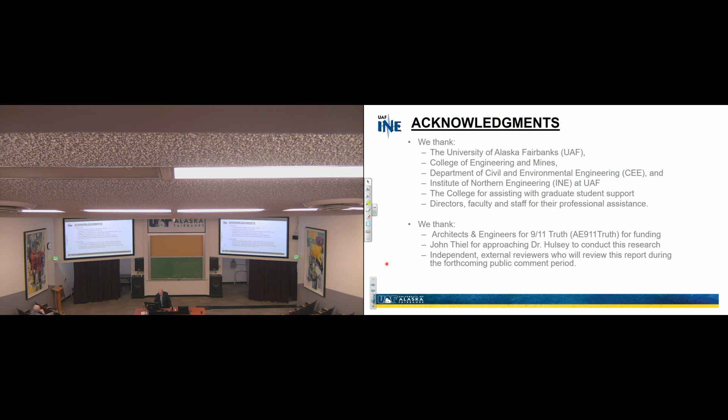WTC 7, the building we're going to be looking at, collapsed at 5:20 p.m. on September 11th, 2001. My focus on this presentation is to present our findings and conclusions from a 4-year study here at this university looking at this collapse. We'll share our methodology and the science that led us to those results. Unlike the Twin Towers, this building was not struck by a plane, so why did it fall? That's the name of the game here.

This is actual footage of the collapse we're about to look at. I want to share this with you to get an idea of why this is so important. 47 stories, all steel structure, and I'm going to let you see it from different angles.

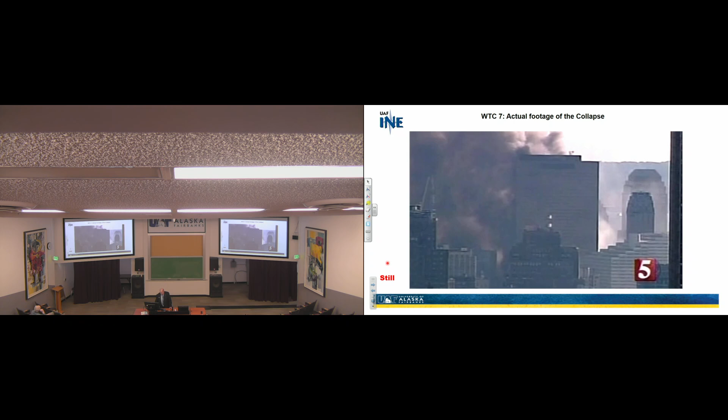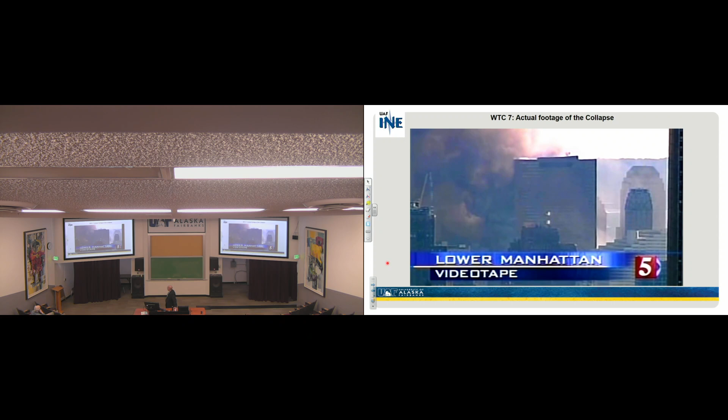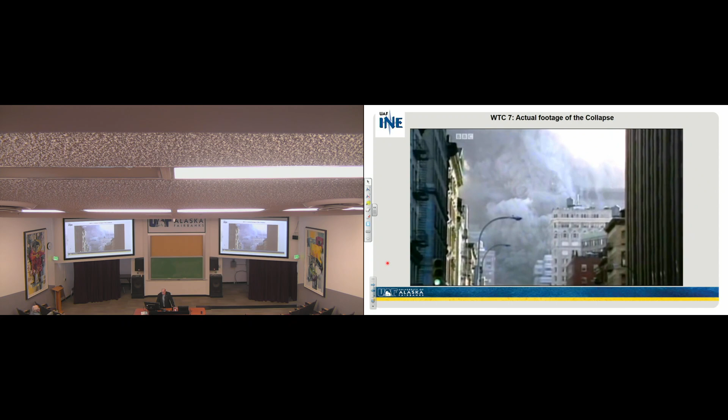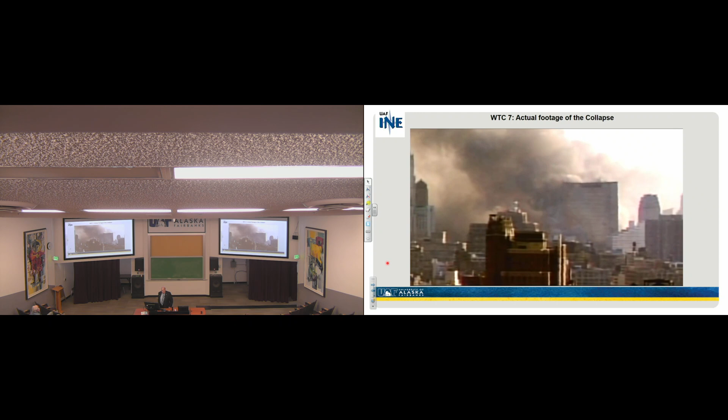So if I go to that, this is what's going to happen - Lower Manhattan. You'll be able to see that this thing didn't waste any time. Fortunately, nobody in the building was killed. We're just taking you through different views that were available at the time this occurred. I'm on mute so I don't interfere with what you're looking at. So we're about done.

So the items I felt we needed for this study were: the structural geometry, the floor usage at time of failure, the structural properties such as mechanical and thermal properties for the concrete and steel, and the structural steel framing, reinforcing bars, and concrete for all those properties.

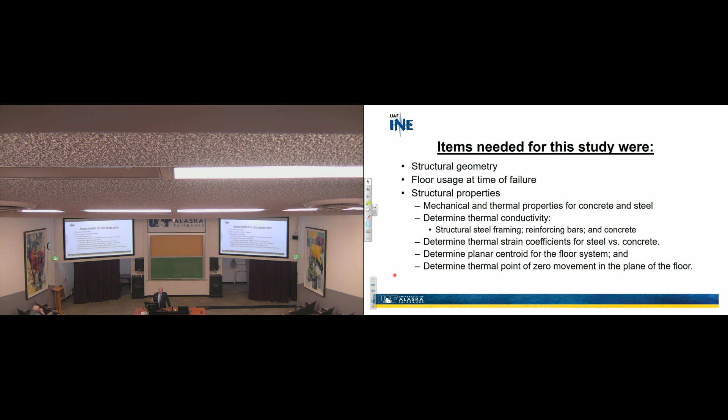We wanted to look at the thermal strain coefficients for steel versus concrete. The reason we're doing this is because they said it was a fire that brought it down, and expansion and contraction with temperature is important, particularly in a fire when it gets really hot. So we needed to look at these properties. We needed to determine the planar centroid for the floor system, and the thermal point of zero movement in the plane of the floor. I'll explain shortly why those things are important - they were totally ignored before by others.

The UAF methodology is as follows: we obtained the erection and fabrication drawings used to develop a virtual structure. Our programs were AutoCAD, SAP 2000, ABAQUS, and SolidWorks. We established right at the beginning a quality control program so we had non-disputable science every single day. Every day we'd meet, criticize each other's work, come to a consensus, or go back and reevaluate. Science was the first and foremost issue of doing this study.

I didn't want opinions, I wanted truth. I wanted science telling us the story. So we created it around the physics, around the engineering, around the things that we knew and could go and justify.

Both Dr. Xiao and Dr. Quan, who are graduates of this university with their PhDs, did this work on this study. Dr. Xiao actually did research to get his PhD on bridges, monitoring structural behavior of bridges. Dr. Quan did his study on heat transfer and also a part of this building.

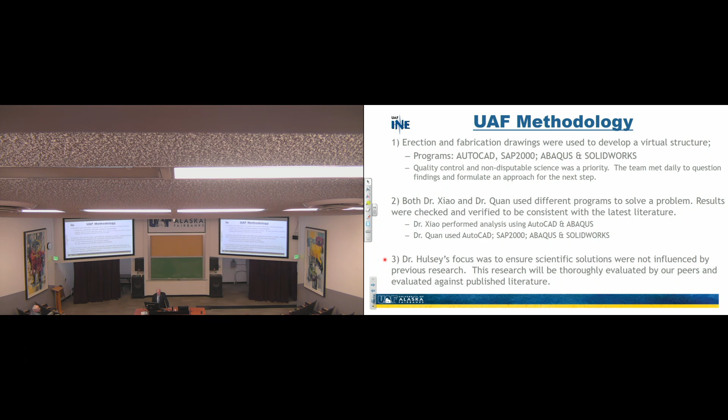Let me give you some history behind this building. The developer was Silverstein Properties. Construction started in 1983 - this is important because we need to know when it was built, what kind of steel was in it. Construction was completed in 1987. The height to the roof was 610 feet, 47 floors, 2 million square feet of space, 32 elevators. The architect was Emery Roth and Sons, and the structural engineer was Irwin Cantor out of New York.

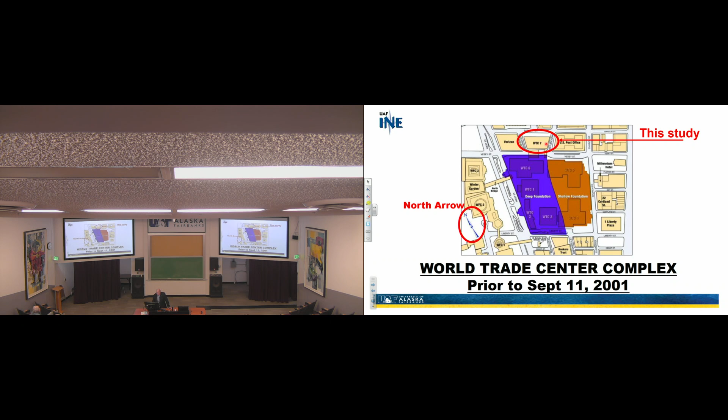Looking at the overview in the plan view of that complex prior to the failures, this was prior to September 11th, 2001. You'll see that this is WTC 7, that's our study, and this is the north arrow, so this is the northeast direction here basically. Here's WTC 1 and WTC 2 that came down by the planes. What's important to think about is WTC 1, when it came down, the debris struck WTC 7, and that debris produced, as most people believe, and I see no reason not to believe that, caused some interruptions in some columns, and it also produced fire in the building. So there was fire - please understand that.

This is a different way to look at that building. What you see here is a north elevation, south elevation, west elevation, and east elevation. Floors 13, 16, 19, and 45 - those are all significant floors that I'll share with you as I go through this.

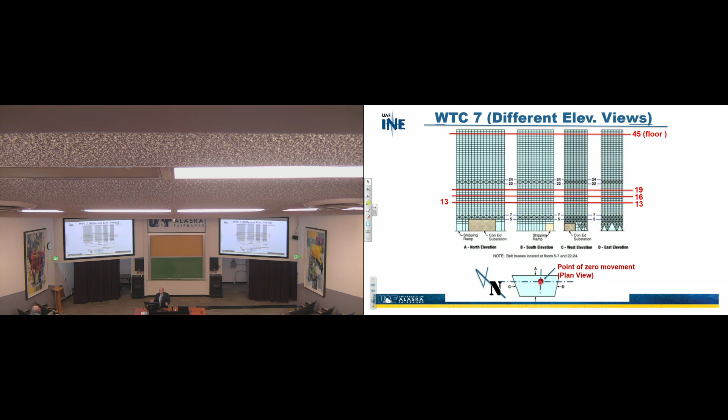This is a point of zero movement. Why is that so important? That is so important because when it heats up, that's the stiffest spot within that planar floor, and therefore everything's going to move with respect to it. So when it heats up, it's going to move in every direction with respect to that red point. It was important to know where that's at.

This kind of gives us a usage of this building, the tenants. You can begin to see that the fires were actually in the floors 12, 13, and below. Look at what's going on here - Secret Service, Securities and Exchange Commission on floors 11 to 13, that was financial, Provident Financial Management. All those floors where all that fire was going on were those kind of things. If you go upward here, Hartford Insurance Group, National Association of Insurance Commissioners, Equal Employment Commission, and so forth. Office of Emergency Management, Federal Home Loan of New York, and then I thought I saw in here somewhere, of course the IRS is there, Office of Emergency Management. I thought really Giuliani's office was here somewhere - anyway, I thought I saw that, but I don't see it today.

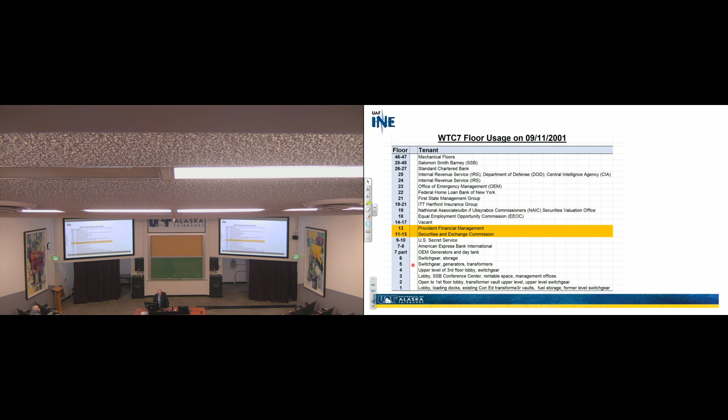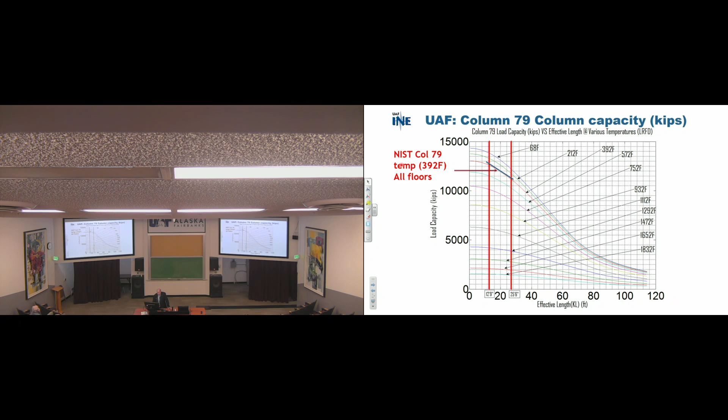This is just another view of that from a different point of view. This is what's called column 79, the capacity of that column we're wanting to look at. This is an unbraced length of 25.5 feet and an unbraced length of 13 feet, so it kind of gives you a range of 2 stories and what we would expect. And there was 392 degrees Fahrenheit for those temperatures in that range, okay?

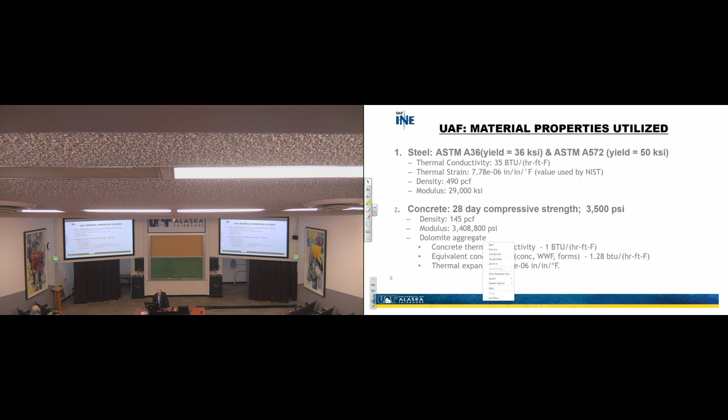With that in mind, we then took all those properties, utilized them, and established the response materially and sectionally, how each one of these members would behave. And with that idea, we could actually start predicting what's going on.

Now, the science behind this study: first we examined the response to fire loads. When I say fire loads, we're looking at fires on various floors and the distribution of that fire, and how it impacted that floor and anything else around it.

The methodology I put together had three approaches. First, we simulate the local structural response to fire loading for floors 13 and below. This is where the fires were.

Number two, we examine collapse initiation hypotheses developed by NIST - the National Institute of Standards and Technology, where the report came from in 2008 - and examine the collapse hypothesis advanced by private engineering firms whose studies were commissioned as part of litigation related to that collapse.

So really what I'm saying is NIST was the big report, and then there were private studies done also during that litigation period. We simulated numerous failure scenarios within the overall structural framing, and for each we identified the response and what would lead to the total collapse observed on 9/11. That's what we did.

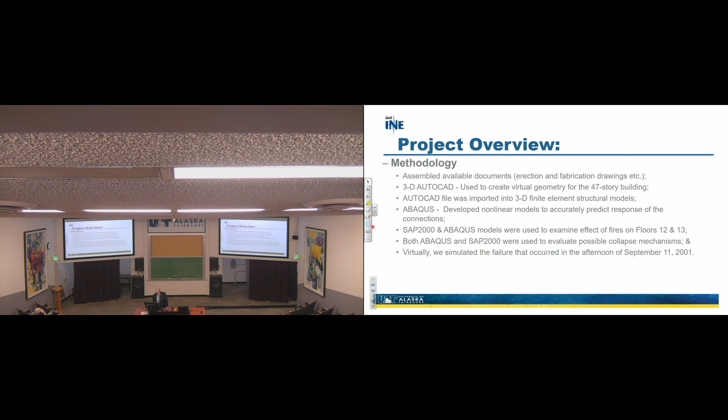Let me share something. We had some of our conclusions done a year ago, but it took us a year to figure out what really were the details of what actually happened during that collapse. We'd already ruled out a lot of things that we knew wouldn't cause it to fail, but those details took us forever. I wasn't sure I was ever going to get through it.

It was that complicated. So the essential findings were: fire did not cause the collapse of WTC-7. Point number one - I told you that on September 6, 2017, and two years later I'm telling you the same thing. Temperature was not high enough to cause weakening of the steel framing. However, thermal expansion did not result in a loss of support for the beams and girders, yet NIST claimed otherwise.

So here's an important point - I'm already different from them because of that issue right there. They're saying the beams in the floor system expanded and caused a problem. I'm saying it expanded but didn't cause a problem. I'll share the details here shortly.

WTC-7 did not experience a progressive collapse as claimed by NIST and others. It was actually a global collapse. So those are my essential findings that are really critical to what we're doing.

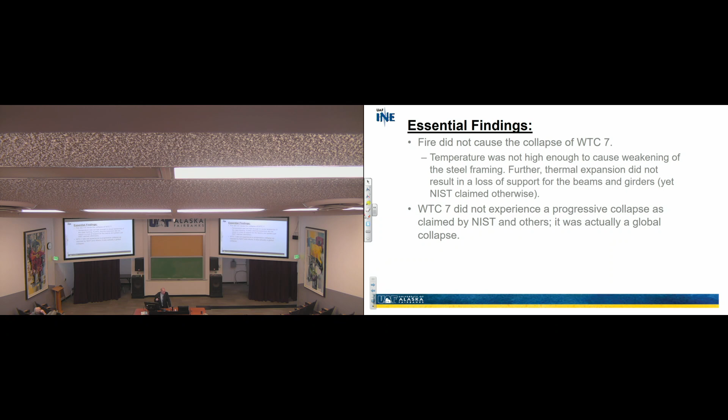I'll give you a number of details as we go through it. The problem is this: the National Institute of Standards and Technology, NIST, reported that WTC-7 collapsed due to fire at 5:20 in the afternoon on September 11, 2001. NIST also reported no other tall steel frame building had ever failed due to fire.

So why is this so important? It's important because it's essential for ensuring public safety that a failure mechanism for a structure is understood so we can prevent it from ever happening again.

We can't afford that. So therefore, architects and engineers, 2,600 of them, put together a non-for-profit group, funded this university to re-examine that WTC-7 collapse. The money came from them through their own donations. So this is how that worked, okay?

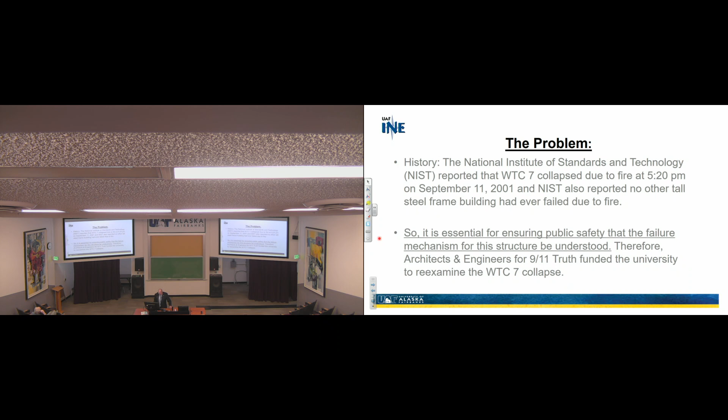Now the key findings of this UAF research team, I'm going to give you a little more detail. So now I'm getting into the details, okay? And I apologize if I'm getting too detailed. So please drag along with me.

Approach one is that NIST overestimated the exterior wall rigidity. Subsequently, NIST argued floor expansion was westward as it moved from the east exterior wall. So remember that east is to your right, as you're looking at that complex, at that building.

And imagine that they locked that wall system and then heated it up. What's going to happen? It's going to move away from it. No, that isn't what happened. The building couldn't do that. It would have to move away from the stiffest area, the centroid, what I call the point of zero movement thermally.

And that was very close to the elevator shafts. So actually, the exterior walls were flexible and thermal movements were from the point of zero movement near the elevators, and therefore planar thermal movements were from west to east at column 79, not the other way around. When I presented that in Boston and in New York at the time - New York was at the 15th anniversary, Boston was a little bit later - that was the first time they'd ever heard such a thing about this. Everybody had always been assuming that the movement was exactly what had been stated it was.

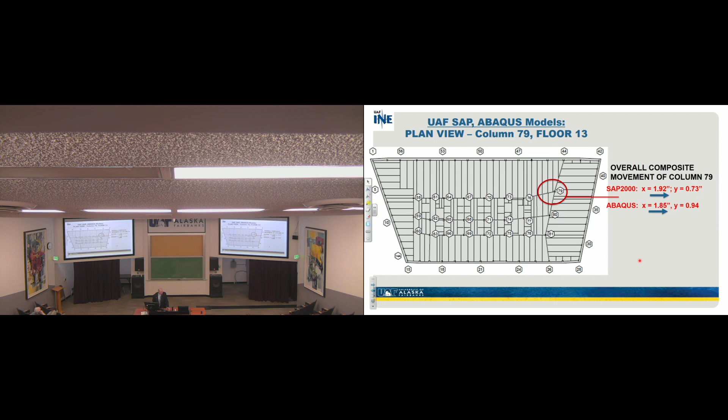All right, good. So approach one - NIST, wait a minute, I'm sorry. So the other thing I want to share with you is the movement of girder A2001 relative to the column 79, floor 13, was as follows. We looked at composite, partially composite, non-composite, and NIST only looked at one thing.

That was 5.5 inches to the left, non-compositely, and these are the things I just told you about a few minutes ago. NIST later revised their girder movement to 6.25 inches after being alerted that the bearing seat was 12 inches wide and not 11, as originally stated.

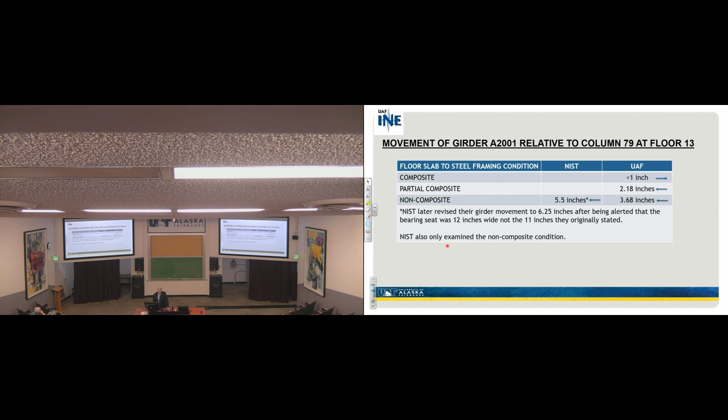And NIST also only examined the non-composite condition, which wasn't the case on that day. It was truly composite. Approach two.

We took ABAQUS, a very, very sophisticated finite element program, which if it doesn't have the algorithms you need, you can add them to it. It's really quite powerful, a wonderful program.

We looked at that program and used it to simulate, using solid elements, the floor framing for floor 13. That's where all the buzz is about. These elements were used to evaluate the validity of NIST's collapse initiation hypothesis, and the NIST assumption that the exterior east wall was fixed was not valid, it was flexible.

I think I've already told you this more than once. Shear connectors on several beams were assumed broken, but we saw no evidence to consider this a valid assumption.

NIST assumed no shear studs were on girder A2001, but we found there were shear studs on that girder based upon the legal records, the court records. NIST also assumed bolts fastening girder A2001 to its seats at columns 44 and 79 were broken. This was also an invalid assumption.

Okay, so here's what we did. Using the NIST assumptions, even though we know that they're not right, if girder A2001 was going to be heated up, we would find it would get trapped behind the west side plates on the flange of column 79 and wouldn't be able to get off of that seat anyway.

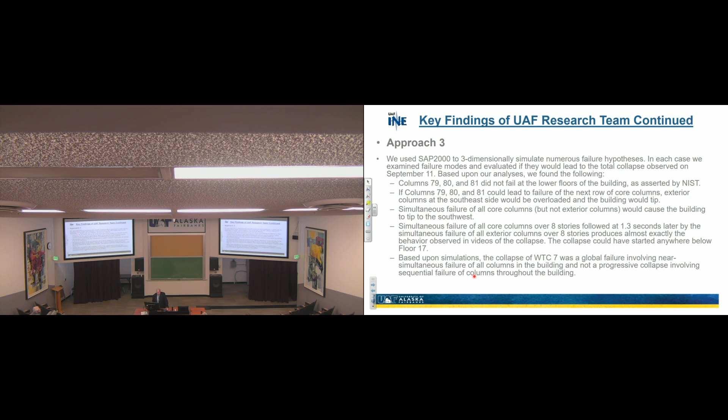Actually, the penthouse came down 5.5 seconds earlier, and I'll show you all those details. Based upon simulations, the collapse of WTC7 was a global failure involving near simultaneous failure of all columns in the building, and not a progressive collapse involving sequential failure of columns throughout the building, as lots of people have argued. The details behind the science.

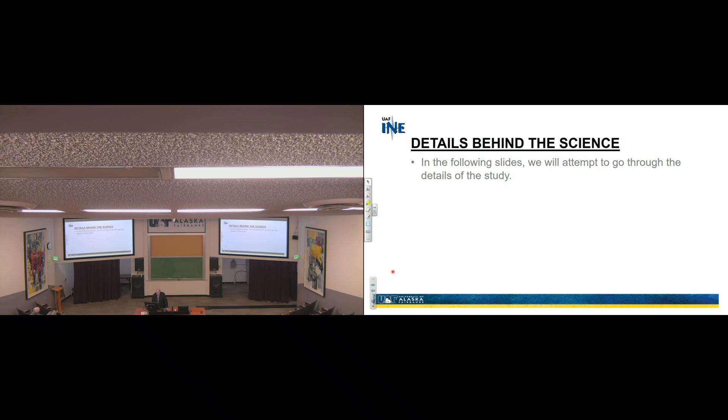In the following slides, I'm going to attempt to go through the details of our study, and I apologize if I'm going to bore you to death.

First, we determined mechanical and thermal centroids at floors 12 and 13. That's the first thing I did the first day we started, because I felt we needed to know if you heat up a floor, where it's going to be moving with respect to.

So I've said this more than once. But we also wanted to know the mechanical centroid, because if you apply a load somewhere on the building, is it going to twist? Is it going to rotate? Is it going to tip? What is it going to do? We need to know its response. It's like a human being: you do something to it, you're going to get a response. So a building behaves similarly. Sometimes it doesn't like you.

Second, we developed a nonlinear spring stiffness for the connections. That was to save time and also to get an understanding of how the connections between the girders, the beams to the girders, and the girders to the columns actually behaved.

Then we developed an equivalent nonlinear spring for the computer model. Third, the concrete floor was built using stay-in-place steel forms, which means the stiffness of the floor was different in mutually perpendicular directions. The forms actually have flutes, and they are stiffer in one direction than the other. It gets poured full of concrete, and therefore the structure behaves differently.

So this was accounted for by developing equivalent performing elements, which we did to save time. Then we could take those equivalent elements, basically substructuring the structure and looking at its behavior. And fourth, we examined the planar thermal movements of the floor for composite behavior. That's when all the shear studs were in place. Partially composite is for frictional resistance between the concrete floor and the steel framing. And then non-composite, in which we allowed for no shear studs or frictional resistance, which is the way NIST did it.

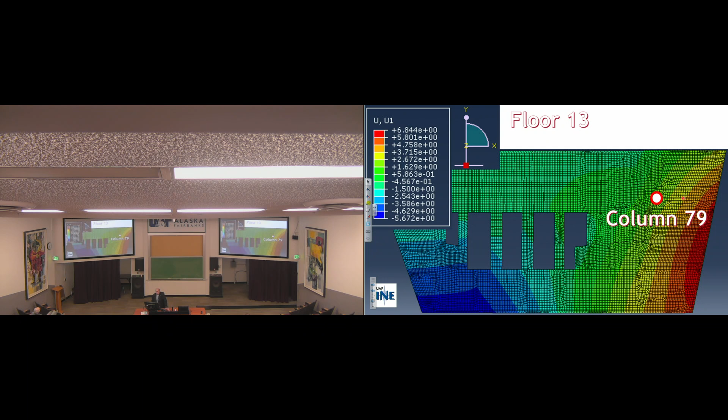So where is all the movement coming from? Look down in here. Plus 5, minus 4, somewhere in this zone is where that movement is occurring from. You see what I'm saying? So this was a computer model of the heat that was put on using the NIST fires, and we simulated them to see if we agreed. This is column 79, and at floor 13, we had 1.85 inches to the east and 0.94 inches north of how much that moved at 600 degrees C.

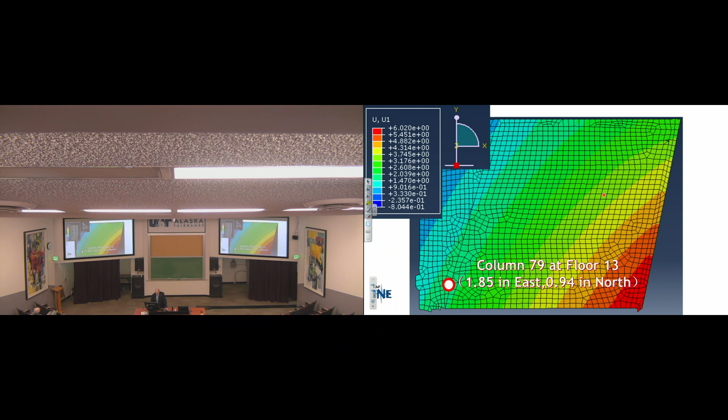Evaluation of the NIST hypotheses is what we're going to talk about next. Here is column 79, here is column 80, 81, column 44. Here's a group of beams with horizontal stiffeners between them so they wouldn't buckle. And here's the other beams, B30048, and so forth. The reason that's important is we're going to take a computer model and virtually simulate that.

Then use the NIST assumptions to see if they were actually correct. I didn't want to just say, okay, I'm not going to accept it. We needed to be sure whether it could have been correct or not.

NIST argues that the absence of girder shear studs caused the girder to not have sufficient lateral restraint. Failure of the girder to column connections were caused primarily by thermal expansion of large span lengths of the northeast floor beams. This is their argument, these are not my arguments, please understand that. You see the big letters NIST? Okay, that's not mine.

So, absence of girder shear studs. If they're absent and it's heating up, and it's moving from that exterior wall that they claim was fixed, then it's going to go west, okay? And this is a plan view, and this is girder A2001 from the drawings, from the actual drawings.

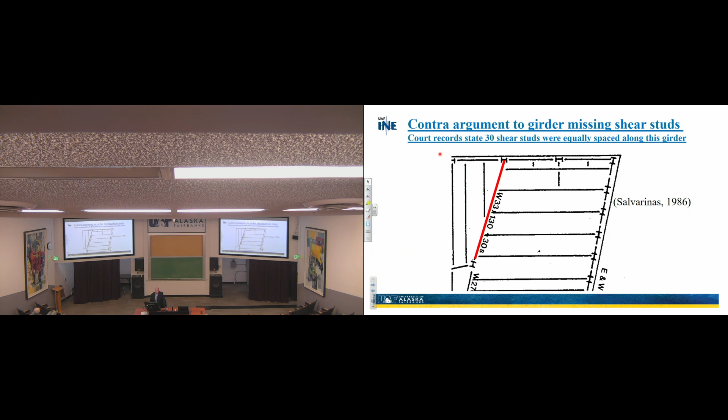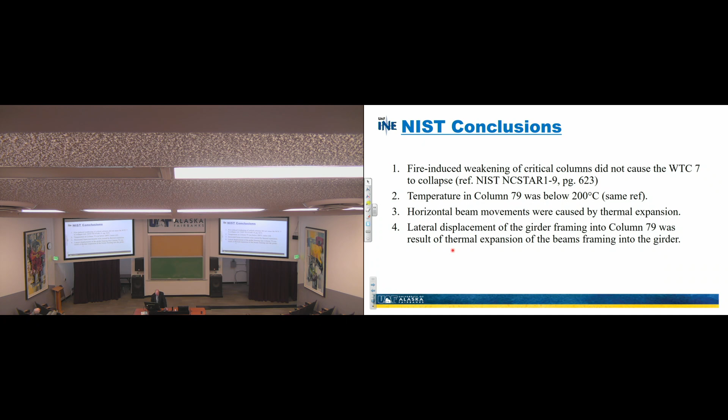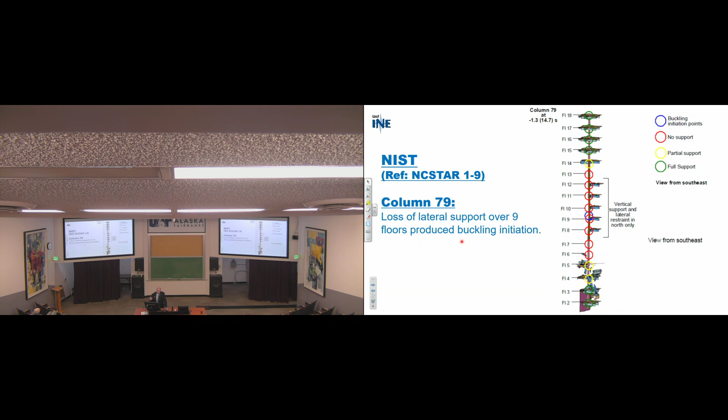Basically, they said at column 79, they lost lateral support over 9 stories, which then caused a cascade of failures to occur. And from that, you would have ended up with the failure you would have seen in the video. Keep in mind, if I was to go back...

Where's column 79? It's not in the middle of the building, it's over there on the northeast corner, pretty much, right? And notice, there's nothing symmetrical about this building, it's a trapezoid. So those things aren't helping anybody. And it was quite a complex building.

The other thing we discovered pretty quickly is NIST modeled the connections within this zone, all around column 79, that whole area. But they did not model the connections over here, and they did not model the connections along the exterior. So all the area of floor where connections were modeled, from floors 8 to 14, were in that zone, which really bothered me, because it's not representative of what the building actually had.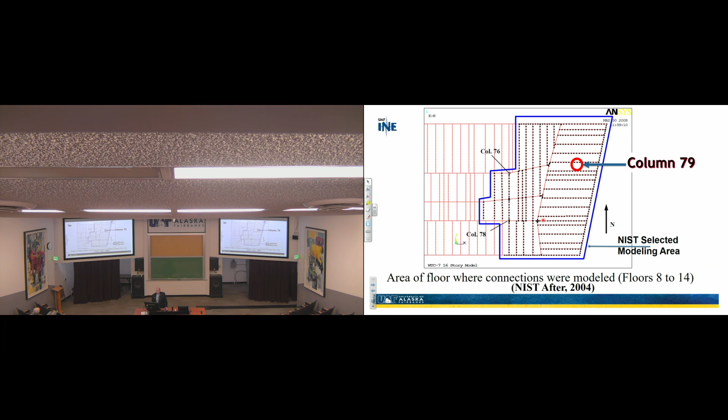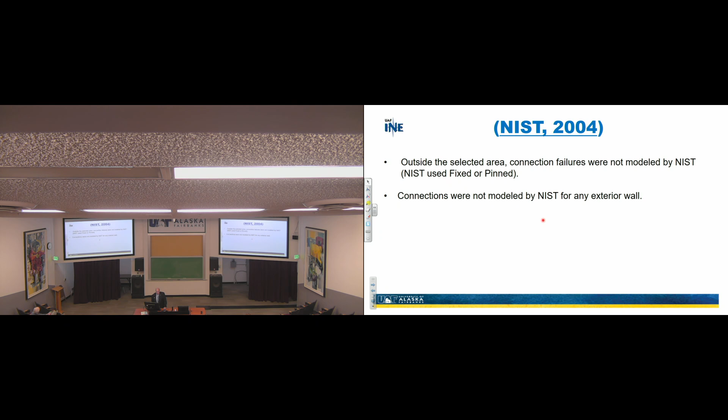So outside the selected area, connection failures were not modeled by NIST. This is just a summary of what I just told you. NIST used fixed or pinned connections, and these were not modeled by NIST on any exterior walls. And so here we are.

A girder was considered to have lost support when its web was no longer supported by the bearing seat. The bearing seat at column 79 was 11 inches wide. Thus, when the girder at column 79 had been pushed laterally at least 5.5 inches, it was no longer supported by the bearing seat. Really? Well, they changed that from 5.5 to 6.25 later.

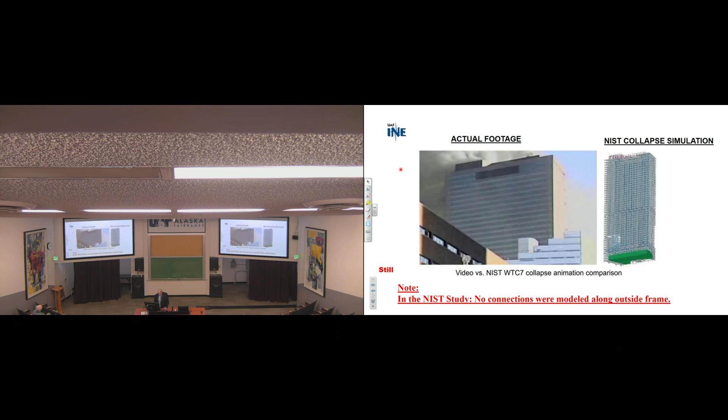So NIST's results were, okay, let's take a look. We're going to look at their model, their simulation, based on what I've shared with you so far, and the actual footage. So bear with me. Note that in the NIST model, no connections were modeled along the outside frame. Just remember that. So here is the simulation that they have.

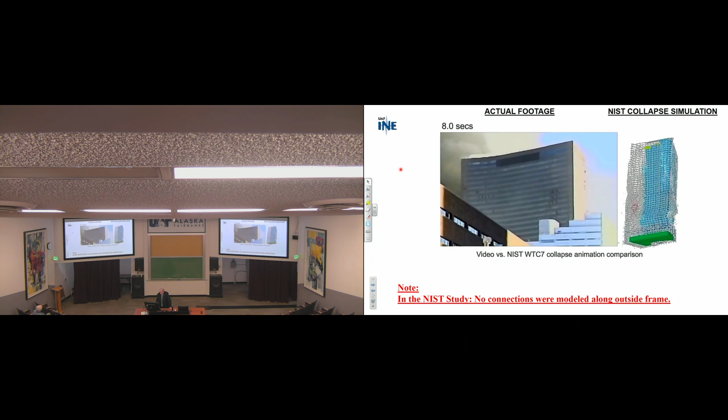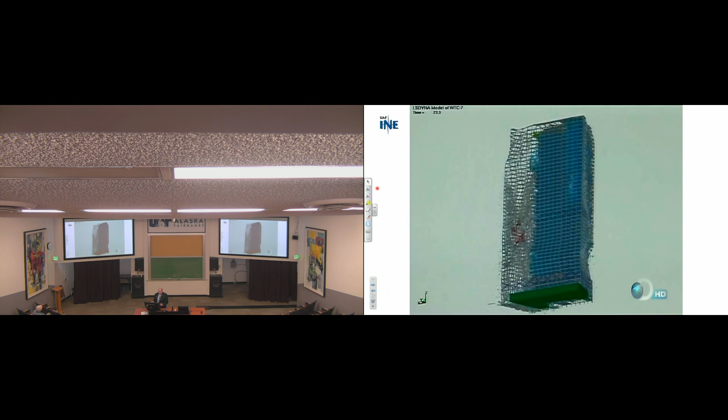That's their modeling. Again, looking at this side right here, you see that there's an outside selected area that was not modeled, and the NIST progressive cracks appear to be in two different parts. Okay, so here you can actually start to see what I'm talking about. You're going to see something going on here. Let's see what it looks like. Notice you have different stiffnesses just because of the connection issue.

Looking at the other side. So this is the NIST simulation. All right, so what about us? What about the UAF analysis of the NIST collapse initiation hypothesis and the propagation claims?

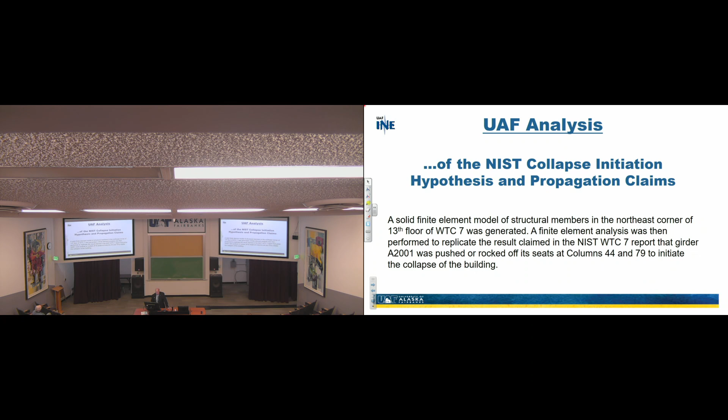A solid finite element model of structural members in the northeast corner of the 13th floor of WTC7 was generated. We used Abaqus to do that, by the way, and we used solid elements. A finite element analysis was then performed to replicate the results claimed in the NIST WTC7 report that girder A2001 was pushed or rocked off its seats at columns 44 and 79 to initiate the collapse of the building.

Here we are with respect to that plan view for floor 13. Okay, we are at floor 13. There's column 79 here, here's columns 80 and 44. We need to focus right here. Girder A2001 spans from column 44 to column 79. Column 79 is circled because that's where all of the buzz was about.

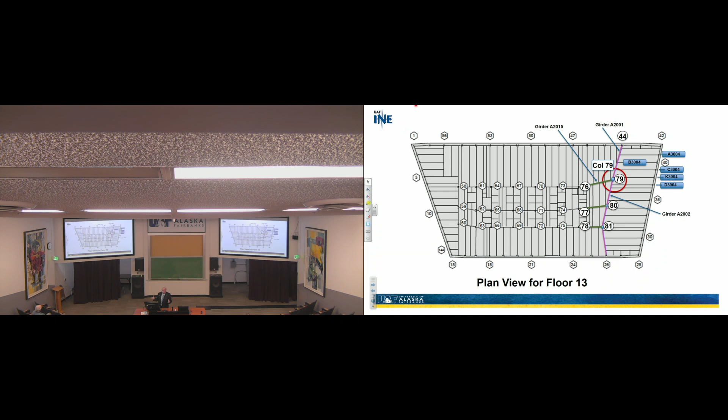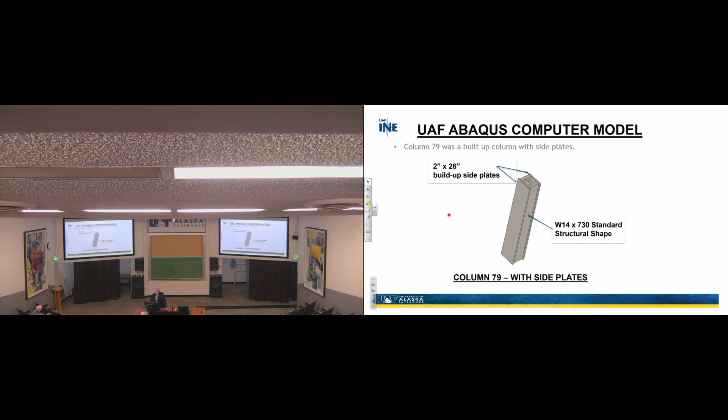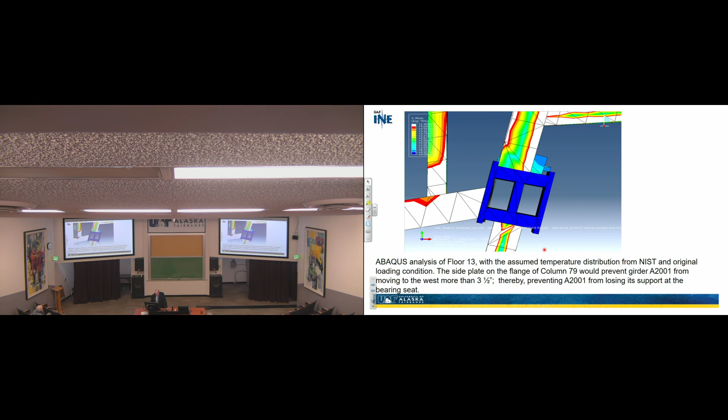This is a view of what happened when we heated it. You can begin to see that this girder tried to shove west using their assumptions, fixed on the exterior wall, all that kind of stuff, and tried to shove, but it couldn't come off of it. So the Abaqus analysis of floor 13 with the assumed temperature distribution from NIST and original load condition, the side plate on the flange of column 79 would have prevented A2001 from moving to the west more than 3.5 inches. Locked in, couldn't do it. So thereby preventing A2001 from losing its support at the bearing seat. Okay, hopefully that's a visual that you can imagine.

This is a NIST analysis. We ended up with the exterior columns having the buckling conditions, W24 by 55 floor beams. This is the W33 by 130. So these are the exterior columns, and these are the floor beams that actually were buckling between them.

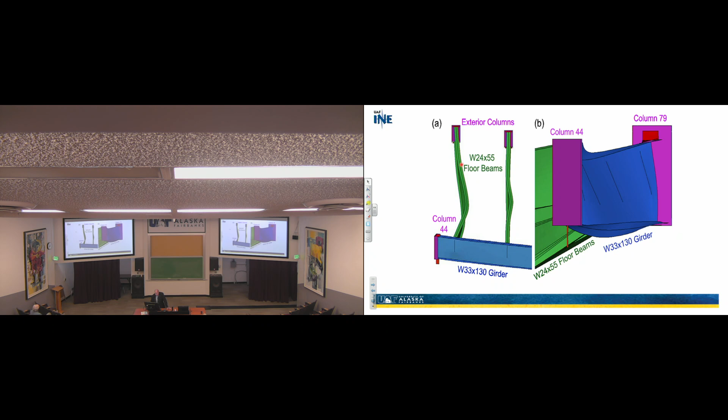Another view of that. Here's what I'm talking about earlier. I said this beam buckled, that beam buckled - this is a plan view, this is column 79 right here, this is the exterior wall, this is due to heat.

I've called your attention to this more than once: they did not include the bracing that was actually built into that building. This diagram demonstrates that two beams close to column 79, D3004 and K3004, had buckled in the analysis, and beam G3005 buckles in the analysis as well. So there's three of them.

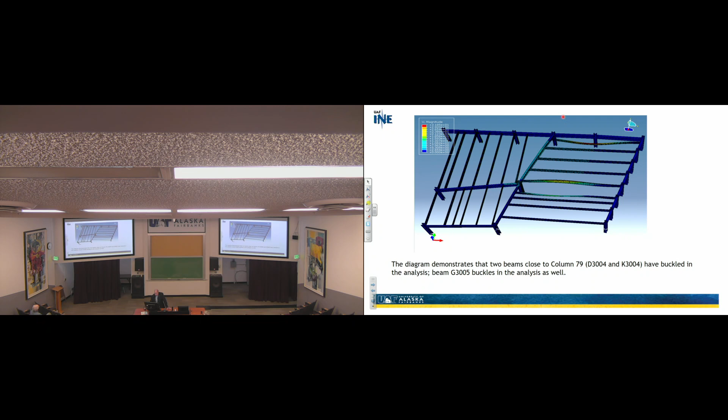The diagram here demonstrates that with those braces in there, it doesn't buckle. So now you only have these two that would be buckling - the two beams close to column 79 that have buckled in the analysis. However, beam G3005 did not buckle as claimed by NIST, as there were three transverse beams, S3007, etc., that were omitted from their analysis. So I've just shown you that.

So, more evaluation of the NIST analysis. The next 5 slides will show that the simulation of floor 13, even if the side plates were not part of column 79, girder A2001 would still not be able to travel far enough to lose its seat support. The reason is simple: it had partial height bearing stiffeners which stiffened the flanges of the girder, thus preventing it from failing. But NIST did not include them, and yet they were there.

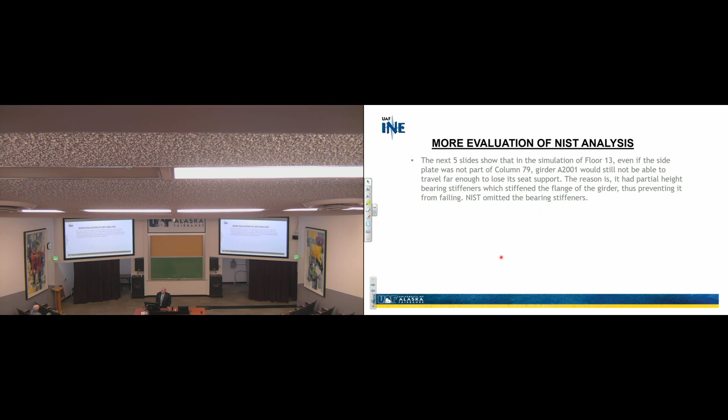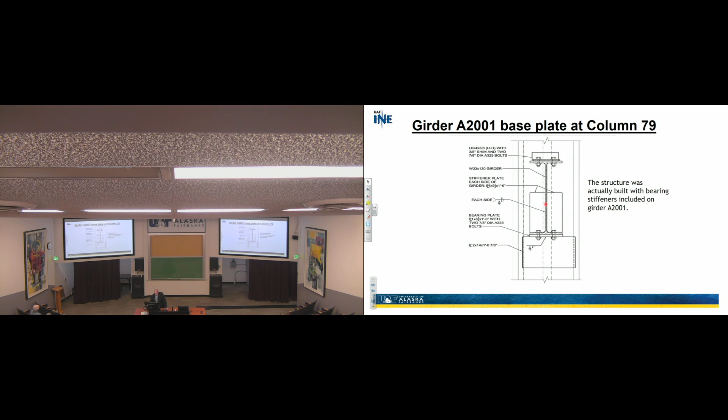So here are the bearing stiffeners I'm talking about. This is girder A2001. Here's the base plate, and here are the bearing stiffeners. They were there. And here's our model showing them.

This is the Abaqus model. This is with the side plates - all that kind of stuff is there. That's our simulation, a virtual simulation of the same thing that was built. That's what we did. We broke them out.

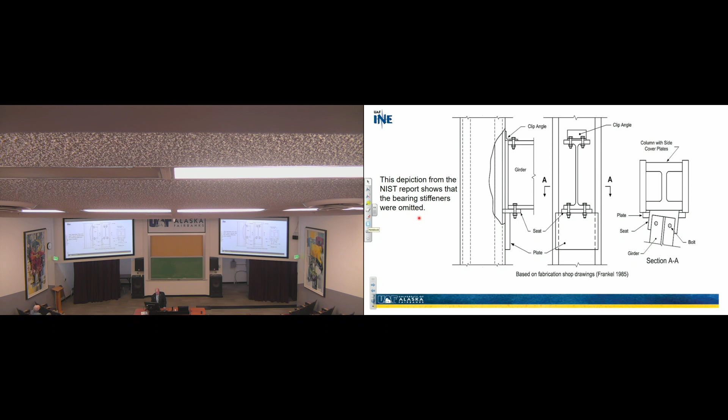This is another depiction of the NIST report showing that the bearing stiffeners were omitted. You don't see them. Another depiction from the NIST report showing the bearing stiffeners were omitted from the girder.

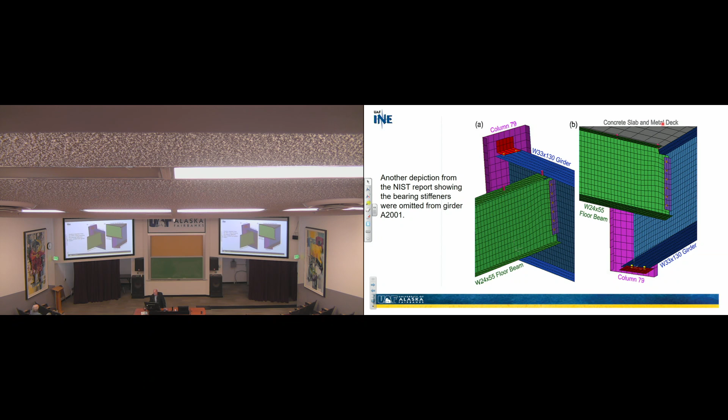So here's the W33 by 130 girder, column 79. Here's the W24 by 55 floor beam. And so this is A2001 - concrete slab, metal deck up here. This is the arrangement, again, another view.

This time, no side plates. Using the NIST model, you could see where it still didn't drop off the base plate - it hadn't moved enough to make that happen. Yep, it was getting way too close, for sure. Another view of it.

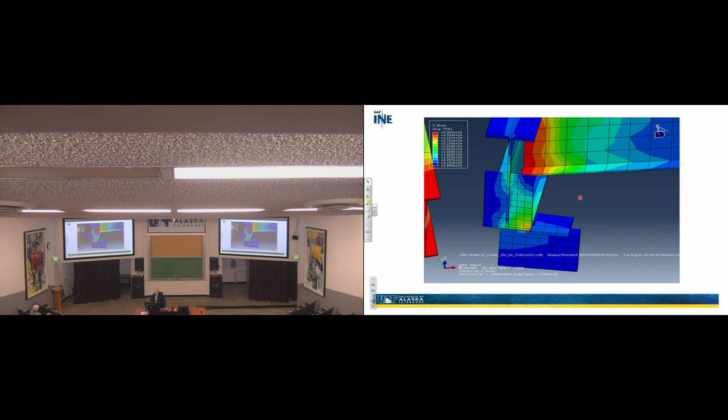Issues that led to the 5.5 inches of movement: non-composite main girders, neglected thermal expansion of the concrete slab, separated connection modeling, and missed web flange stiffeners.

I want to point out, I haven't talked about this yet, but if you take steel, it has a thermal expansion of about 6.5 times 10 to the minus 6 inches per inch per degree Fahrenheit. If you take concrete, it's made up of rocks, water, cement, and the kind and amount of aggregate is going to significantly affect that thermal expansion. Limestone, for example, has a very different thermal property than sandstone, than dolomite, than other rocks. Each one of those have thermal expansions that can range from 2 times 10 to the minus 6 all the way to 12.5 times 10 to the minus 6, depending on what you're putting together with that steel.

In this case, I tried to do our best to locate what the aggregate was that they were making concrete with in that area and put that into our model, to simulate what was going on.

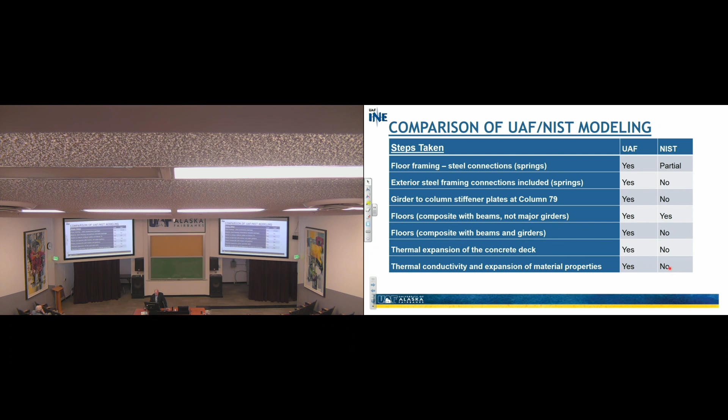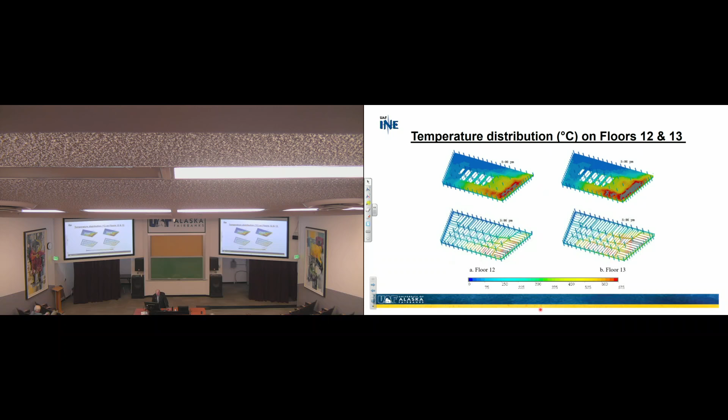The UAF WTC7 Abaqus modeling - this is kind of what it looked like. You can begin to see that this is for floor 12 and 13, not for all 47 stories. You can imagine what it would have meant to do that.

We took a look at the connections between the deck and the beam, and I haven't put very much in this slideshow about that. Basically what we did is we looked at a frame insertion point, joint offset, and we then accounted for the interaction between these two when they were acting compositely. We then looked at sample connection response.

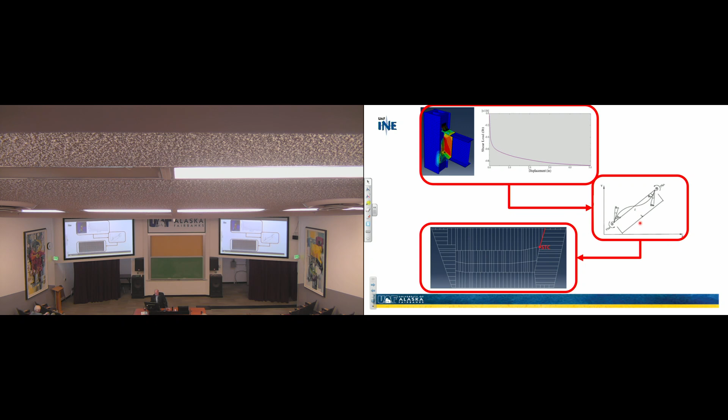Here's a sample connection. I'm not going to show you all of them, just a snapshot of what we did. Here is the model, and here is its performance, shear loading versus displacement. We ended up with a behavior that looked like that, and here's where it was located in the building.

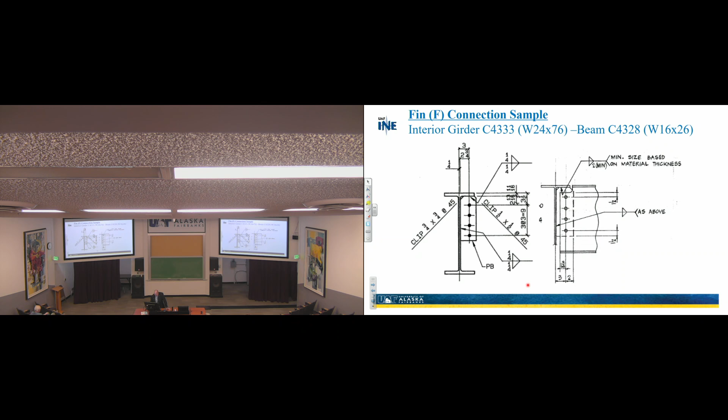Then we took another one. This was what they call the fin connection sample, where we had an interior girder going into a beam, W16 by 26, and we modeled it, and that was what's called F, and that's where it was located. So we took each one of these, put them together, and put it into the structure.

This is the Abaqus connection model that I'm just talking about. You can see it's a shear connection, just bolts. The flanges are not fastened to anything to resist moment there.

Here's an example of it behaving. Oh my gosh, it's actually moving, you see, and it has the bolts there, the shear bolts, and that's pretty much how it's going to look.

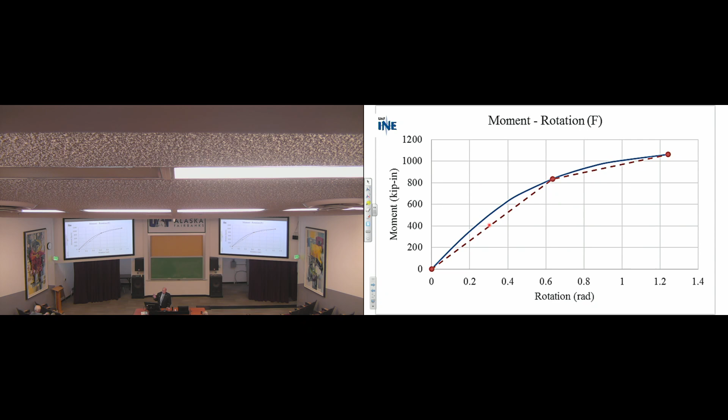And this is the moment rotation curve for that. Despite the fact I said there's no moment, the bolts are still resisting some twist, some rotation. Here's another look at what it's going to look like if it's really starting to get stressed.

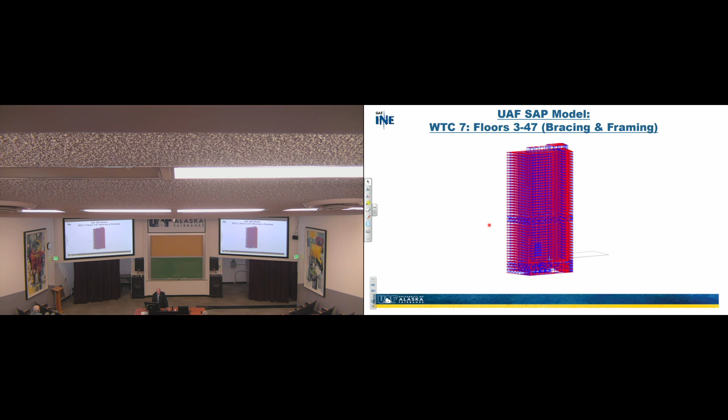Shear displacement. Then what I'm going to take you to now is what we call the UAF SAP 2000 collapse computer model. This is the 47-story building, floors 3 to 47, including all the bracing and the framing, three-dimensionally.

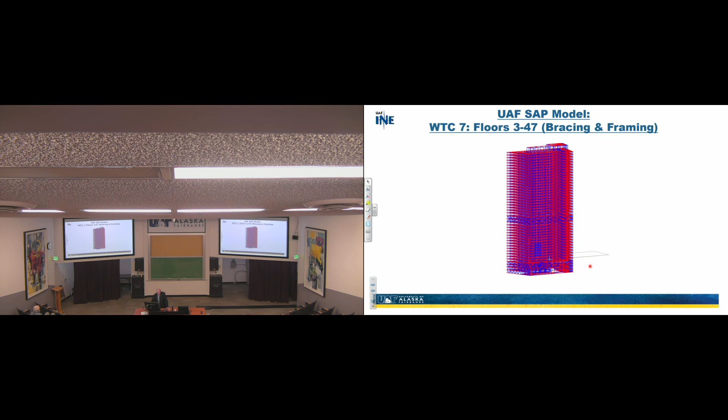The structure was built on a substation down here. I didn't talk about that much. I guess I had enough to talk about for four years, and I didn't want to hold you that long. So we have basically computer models to look at what's going on. Oh, I'm sorry, I'm going in the wrong direction. I apologize.

What do our UAF conclusions say? The concrete floor beam diaphragm stiffness is significant even with no shear connectors, because there's friction between the concrete and the steel framing, and it's not trivial. The thermal expansion of the concrete deck cannot be ignored, and it's likely less than steel; the value is highly dependent on the type of aggregate.

Okay, I've intentionally taken you down redundancies all night long because I wanted you to be able to remember what I was getting ready to say.

The research team evaluated fire by considering the airspace below the beams and the space between the drop ceiling and the structural steel framing. I initially did not intend to do that. Our dean said, maybe you should think about that. So I did. So we did look at that issue.

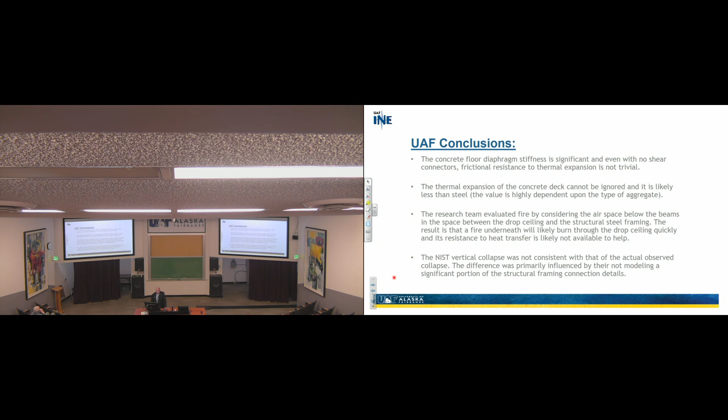The NIST vertical collapse was not consistent with that of the actual observed collapse. The difference was primarily influenced by their not modeling a significant portion of the structural framing connection details. At least that was certainly some of it.

So what about the actual collapse? We evaluate possible failure modes using SAP 2000. We conducted failure mechanism studies using both Abaqus and SAP 2000 to ensure reliability and accuracy.

What I'm saying is that people would contact and say, hey, take out all the core columns, and then the exterior columns will be folded inward and they'll buckle, and that's what really happened. We would try it, just to see, and we could never get that to actually show up as one of the mechanisms for failure. We did it over and over and over again. A number of engineers said it had to be that. It just would not be the case.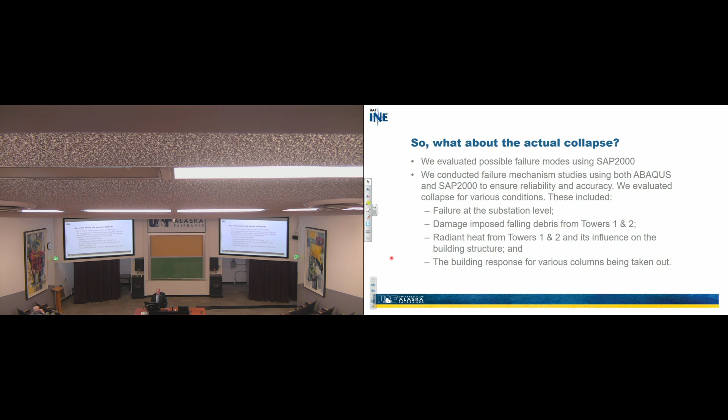Damage imposed by falling debris from towers 1 and 2 - we examined that, did it cause a problem? It really didn't do very much damage, but we did consider it. We looked at the radiant heat from towers 1 and 2 and its influence on the building structure - not much influence. The building response for various columns being taken out, we did spend a lot of time with that, and I would have spent time with other things if it hadn't come to the point where we knew right away that there was nothing going to happen, following that path. It just was not going to get us there.

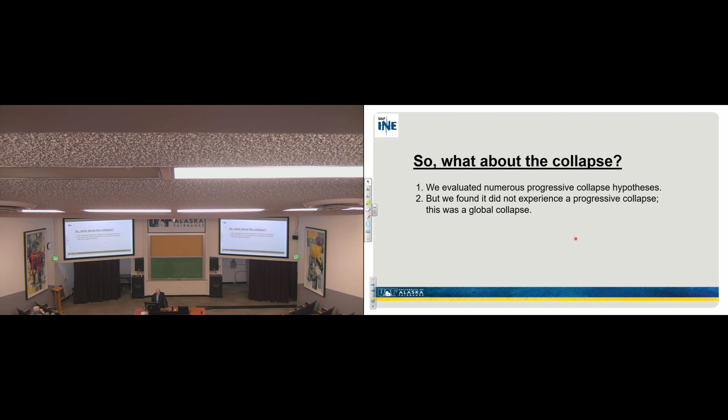So what about the collapse? We evaluated numerous progressive collapse hypotheses, but we found it did not experience a progressive collapse, and yet we then determined that it was going to be a global collapse.

First global collapse simulation in perspective 2. So we're going to look at it from a little bit different direction. The simulation was done to compare with the collapse footage, and this again was set at floor 13. So here it is - videotape of the collapse itself. Now we go to videotape of the collapse of this building.

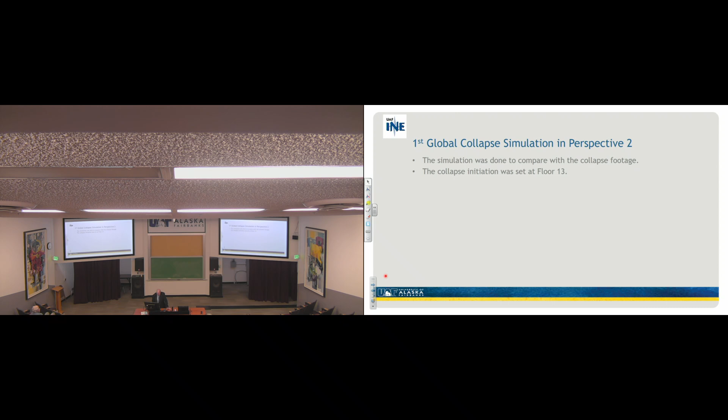I'm going to go back up to here. I want you to be aware that when we started, we noticed that NIST did this, and we did it too. So the question is, this penthouse starts coming down first, and because it's coming down first, what is causing that to happen? We determined column 79/80 was causing that to fail. Remember, we spent a lot of time on column 79 and 80. So we then took it out at floor 13, just like other people did.

And then I began to ask the question, what if we took it out up here? What if we took it out up here? And we were not able to get the time simulation to work until we started getting higher and higher. So right here, when you watch this video, it's about floor 43. But I took it all the way up to floor 45, and we were almost dead on to the actual footage of the failure. Now let me show you what I'm talking about.

Here it's going down, and notice it's going to stop right there. And that's way above any fire - the fires were all floor 13 and below. So it wasn't a fire that caused that either.

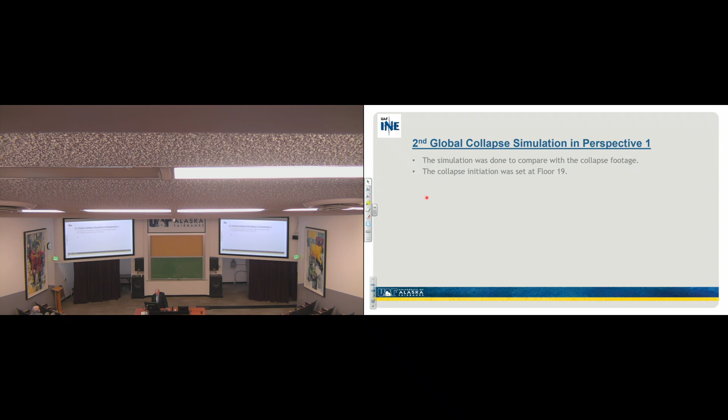So this is a second global simulation in perspective 1 that I want to show you. Here I'm not cutting them off at floor 13, I'm cutting them off at floor 19. What does that look like as an example? Here is what we're about to see, a different perspective. And here it is.

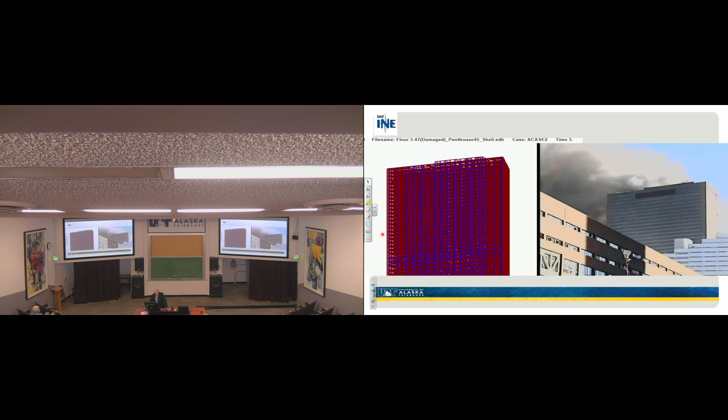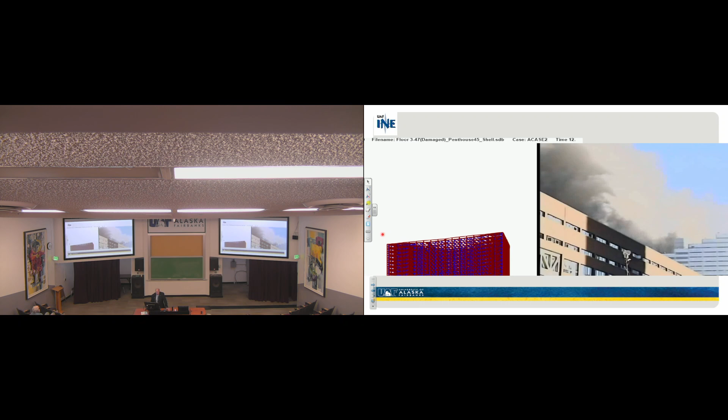Okay, second collapse, global collapse perspective 2. Here we're going to show you a videotape of the collapse itself. Now we go to videotape the collapse of this building.

And then progressive collapse simulation for NIST assumption. What we were doing was showing you what we found. What I'm going to do is share with you what NIST said had to happen, and we're going to show you the computer response to that, okay?

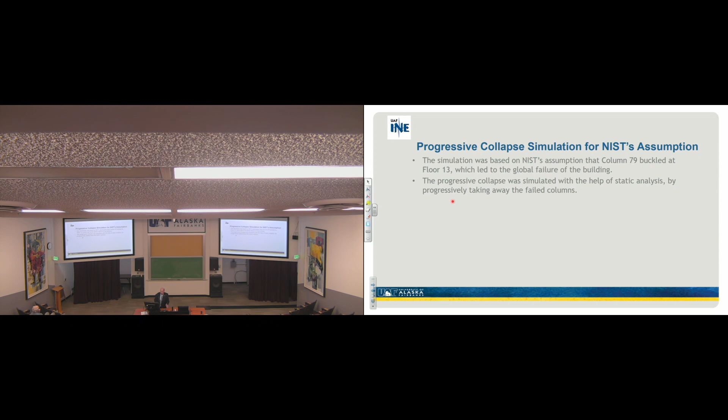The simulation was based on the assumption that column 79 buckled at floor 13, which led to the global failure of the building. The progressive collapse was simulated with the help of static analysis by progressively taking away those columns that failed. When you take some columns out, the load's still there, it's got to be taken by something else, right? So we progressively took them out to get a handle on what it looked like.

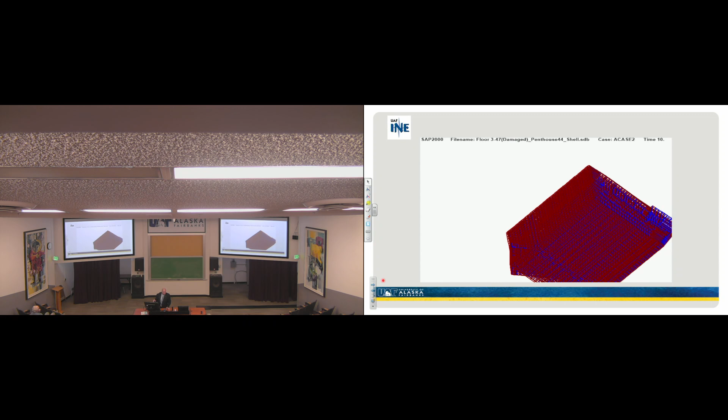So here's where we started with the whole three-dimensional building, and here's what started to happen by taking them out. So it wasn't the collapse we see, it wasn't the collapse that they showed on their computer. But if you put the story into the computer models, this is what you're going to end up seeing: tilting, which is what I was pretty confident I was going to see on the first day when I looked at that centroid issue, because I'd done enough high-rise buildings to know that they're not wanting to fail straight down unless they are uniformly distributed straight down.

So the analysis was based on this assumption of column 79 buckling at floor 13. The static analysis started by failing columns 79, 80, and 81. Even though through the analyzed axial forces it didn't exceed their design load capacity, you're going to see green circles. Green circles mean it didn't exceed the capacity. Red circles mean the columns exceeded their design load capacity.

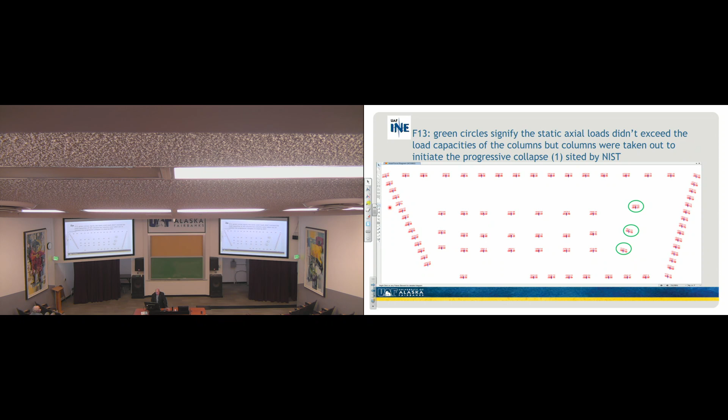There's 3 columns — did they exceed or not exceed? Did not, right? So we don't see anything happening yet. Still, nothing failed at column 79, 80, and 81 when removed, but column 76, 77, and 78 were removed to initiate progressive collapse. We took them out anyway, all right?

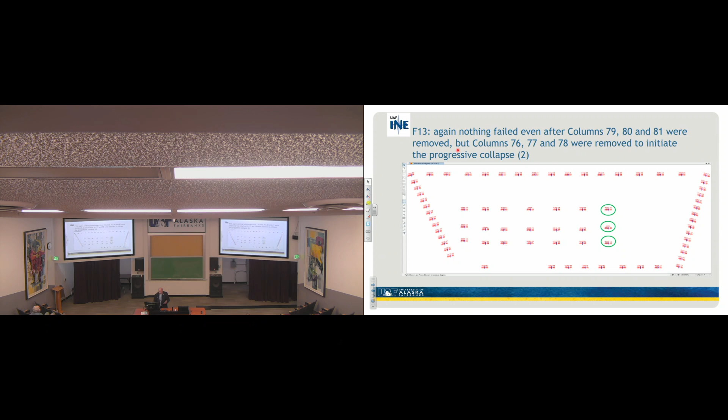Here's a look at the floor system from the side view, and then you begin to take these out as you move forward. So some of the columns started to fail, significantly signified by the red, and the green circles again signified the axial load that didn't exceed the column load capacity.

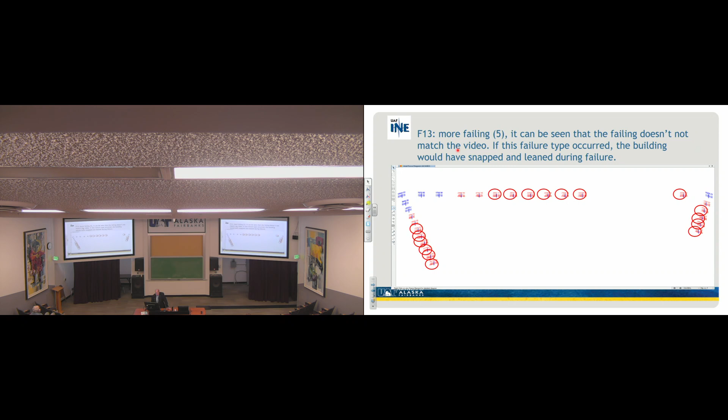We keep taking them out. Now there's no columns left, and there's nothing there to carry the load. By more failing 5, it can be seen that it does not match the video. So here is what the building would look like in a tip mode, and that would be another view of that failure, and so forth.

Okay, so that's my story. Here's the summary and conclusions, and then I'll let you go home and eat.

So WTC 7 did not fail due to fire. WTC-7 did not experience a progressive collapse. WTC-7 came down as a global failure in free fall.

The penthouse failed when column 79 lost its support near floor 45, above the fire, and this failure occurred approximately 5.5 seconds before all the inner core columns failed lower down in the building. After the interior core columns failed, 1.3 seconds later, all the exterior columns at that same floor level failed.

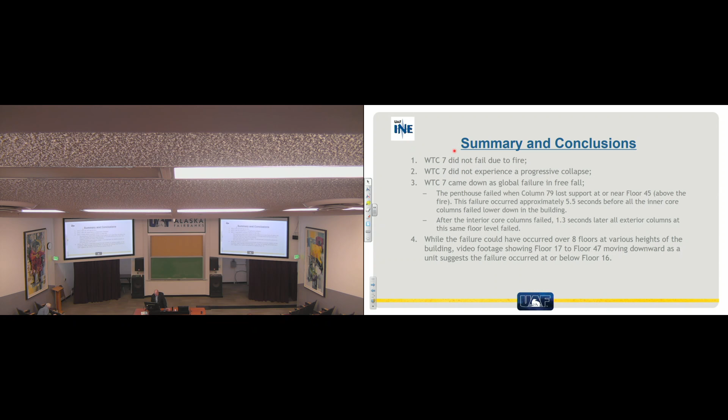We do know that more than one possibility could have occurred to give you almost identically the same thing. We know from floor 13 to 19 for sure we could simulate that very easily. While the failure could have occurred over 8 floors at various heights of the building, video footage showing floor 17 to 47 moving forward or downward as a unit suggests the failure occurred at or below Floor 16. That's just to put it together.

Okay, so are there any questions? I apologize for taking your evening.

Well, thanks, Leroy. Do we have any questions? There's one back there. Larry.

In one of your later slides, you showed columns with green circles and red circles. So the green circles are within their design specifications? Correct. And the red circles had exceeded their design capacity? Correct, so we took them out.

Engineering design, especially in structures, tends to be very conservative. If the designed load for a particular column is X number of pounds, is that the actual failure point, or is the failure point significantly higher due to conservative design?